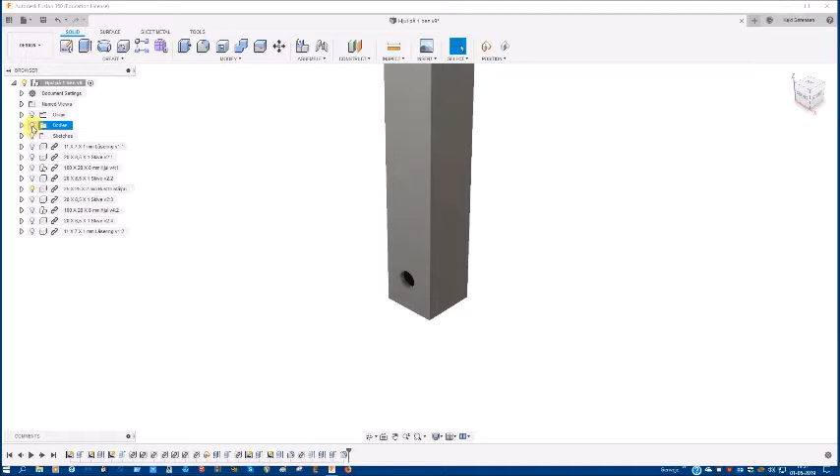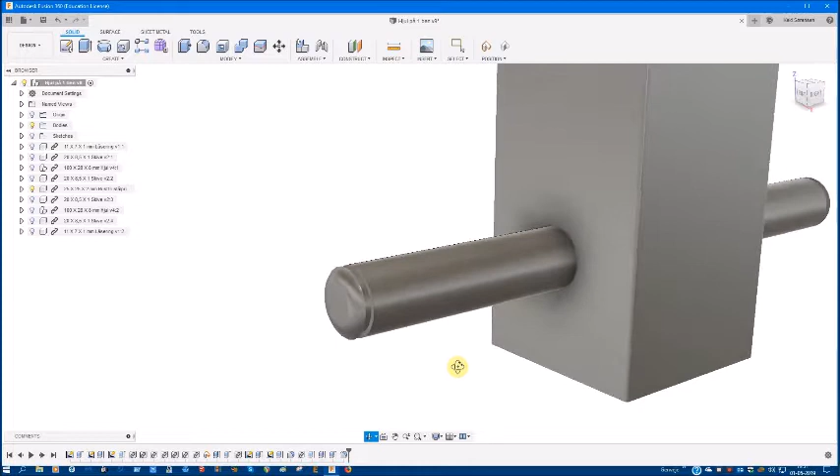Take a look at this drawing here. Here I have my rear legs on a chair, and I've already cut off a piece down here to adjust for the wheel, the radius of the wheel. And I've drilled a hole through here, 8 millimeters, and then I plan to make an axle, 8 millimeter stainless steel, and I've made a form tool for my lathe to make this ball or dome shape here, and another tool for making this groove for the locking ring. And of course they are repeated over on the other end of the axle.

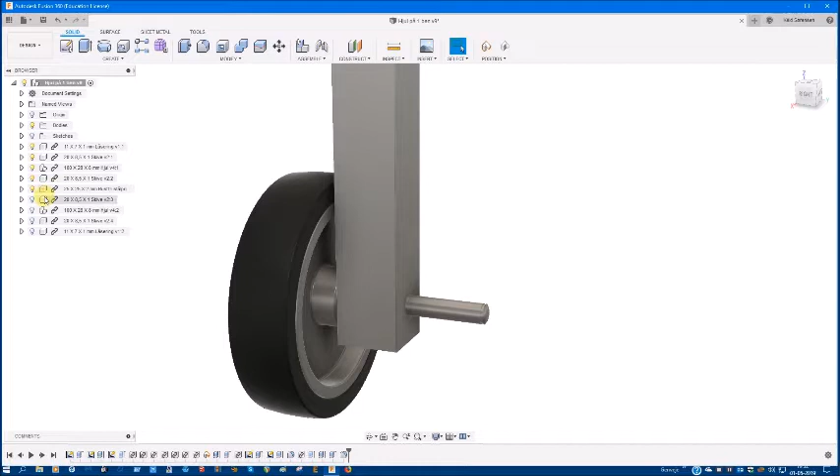Then on each side of the leg here, I plan to have a washer close to the leg and a wheel on top of that, and another washer, and then the locking ring. That's one side of the leg, and repeat it on the other side here. That's how it looks.

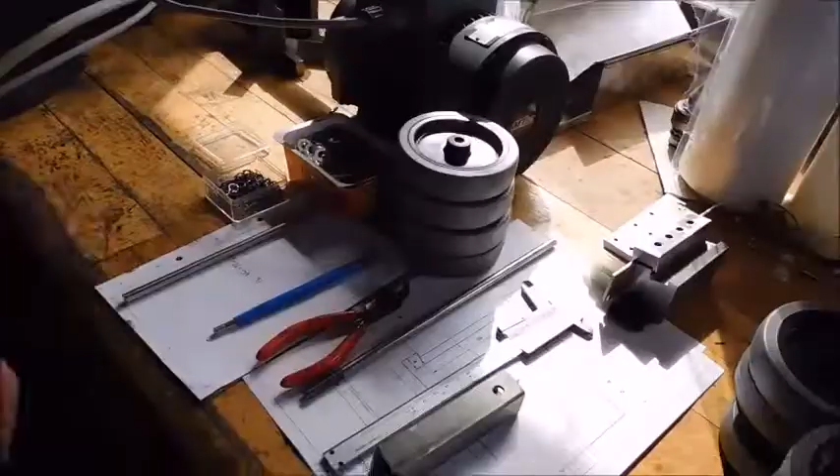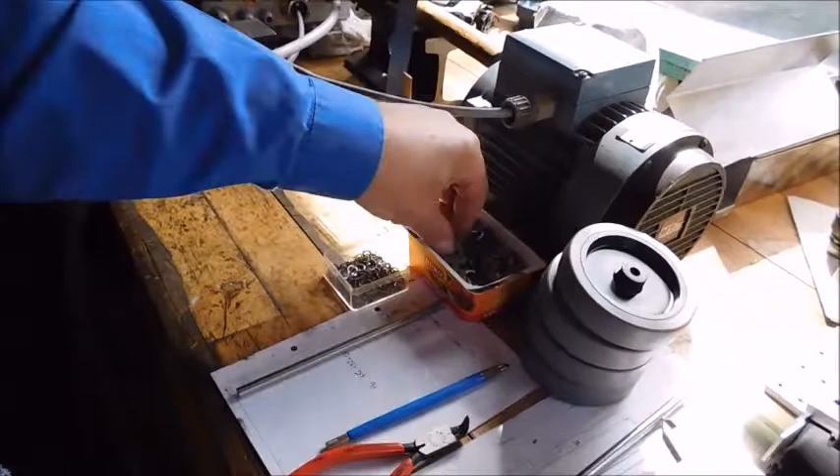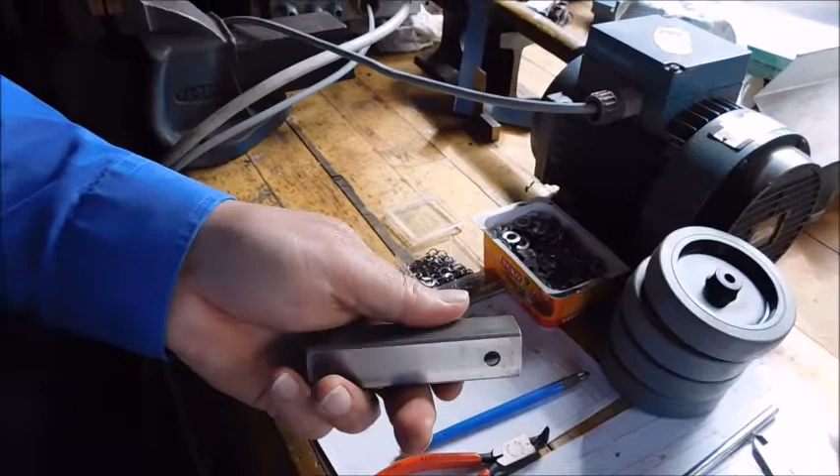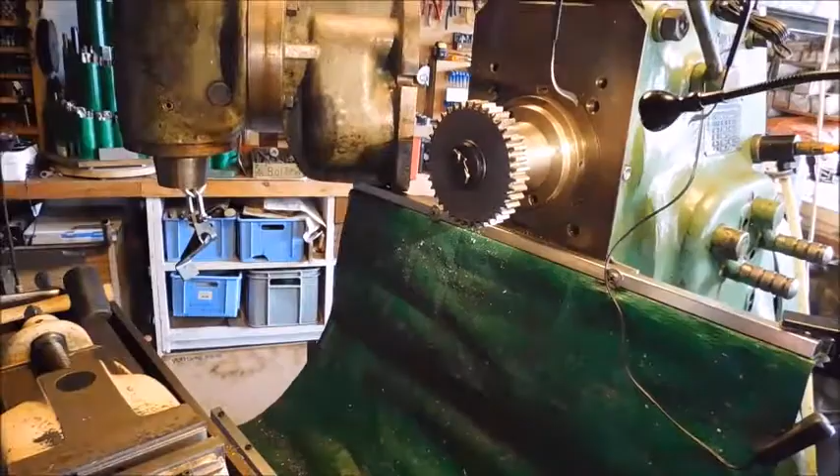And I'll make all this hardware in the first place, so that when I have cut the legs and drilled the hole, I can just mount this hardware on each leg, and then I think it's relatively quick to change the chairs to wheelchairs. So let's see.

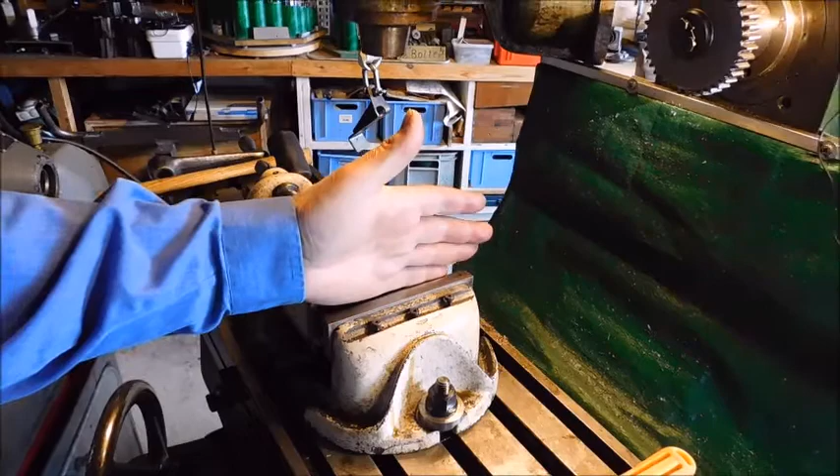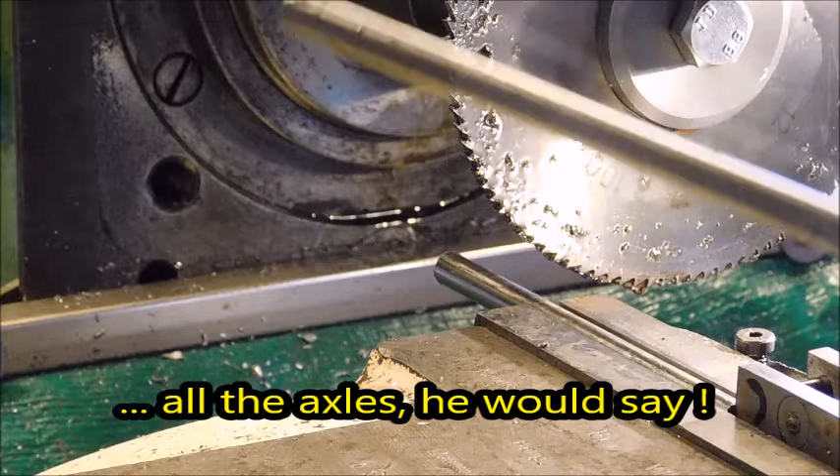I think I can mount this cutting disc on this arbor here, and then mount the small rods in the vise here and cut them into equal length. Later on, when I have to cut off the legs, the rear legs on each chair, I can mount each chair here with one leg here and the other floating in the air over here, and cut the length off, and then move the chair over here with the other leg and cut the other leg. So I'll prepare for this cutting in the first place.

Now I've set it up so I can cut all these pieces here in the correct length. I have a stop here on the back jaw of the vise at exactly 91 millimeters, and I'll start cutting now. There's some squealing because of stick out on the other side of the cutting disc. Not much this time, but next time it'll be longer stick out.

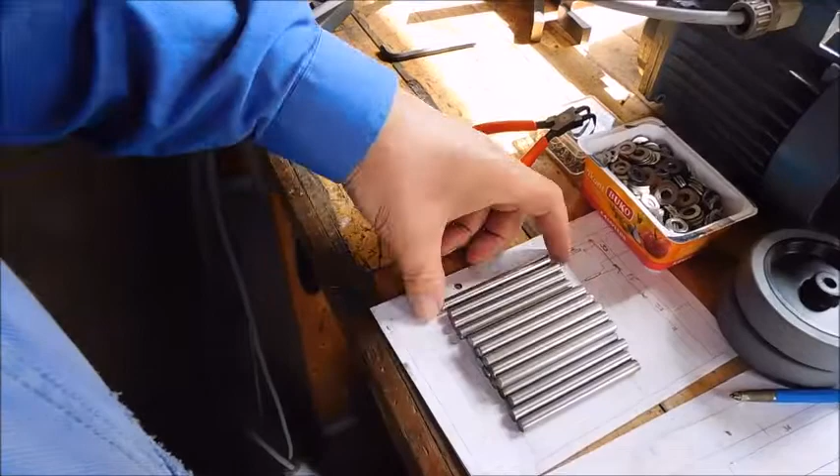Much more to go, so I'll come back when I've finished.

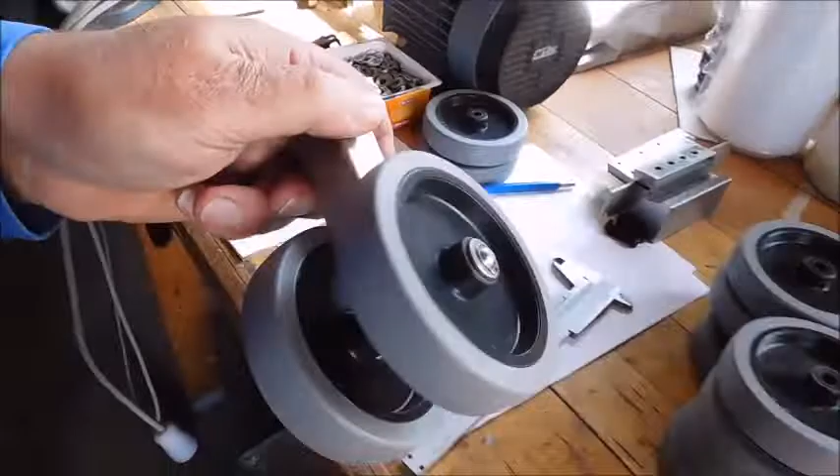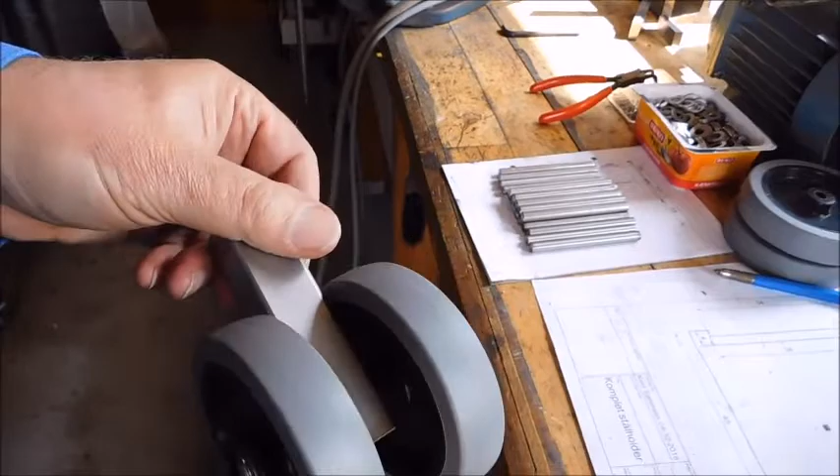Now I made all the axles here, and I cut them to length, 91 millimeter, and now I want to make this ball shape here in the end of each of them, and the groove for the locking ring. And I made a form tool on the lathe to do this, and another tool to cut this relief here. And I made one sample here to show how it looks. I think that's really nice.

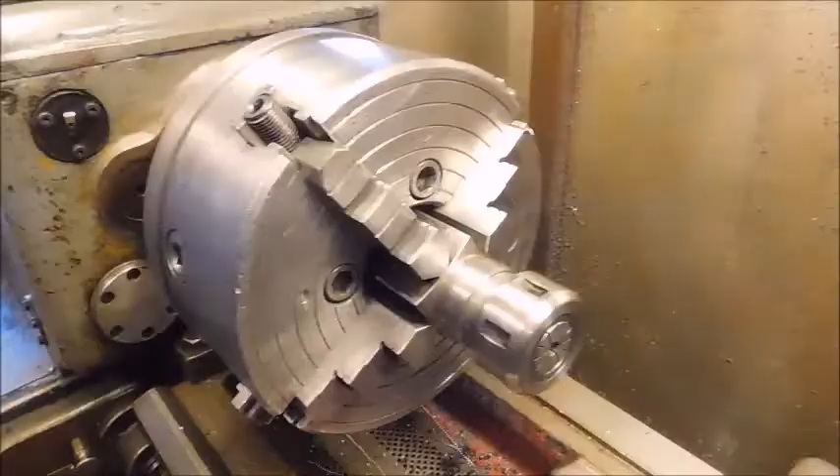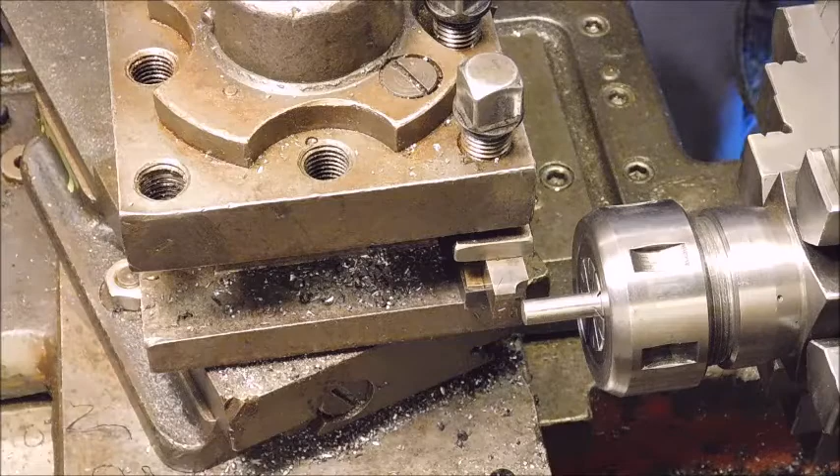So to the lathe and do these. Here on the lathe I have made these tools for forming the dome on the axle, and another one over here to make the groove for the locking ring. Unfortunately I'm not finished with mounting directly in the spindle, so I have to have this fancy setup here with a 4-jaw chuck in between. It would have been much easier to use this, but it's not finished yet.

Now I've set it up in the lathe here and prepared for making the dome in the first place. But I don't think you can hear anything when I start the lathe, so let's talk later.

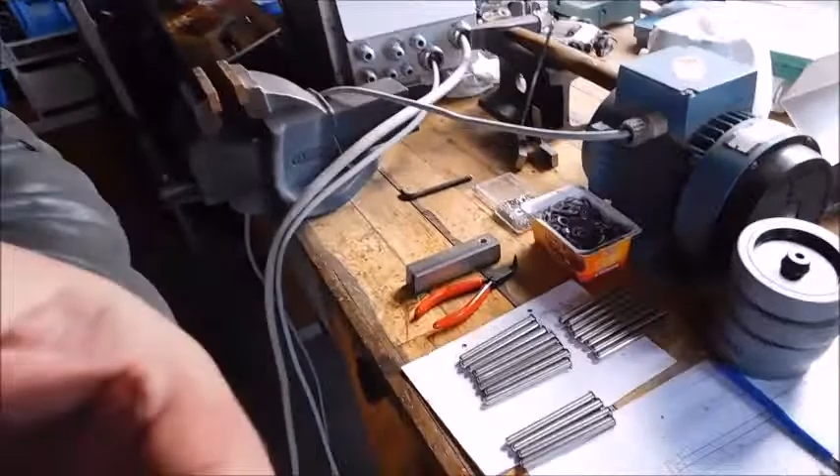Yeah, that's it. Because they are cut off in the correct length, I can just turn it around and do the same thing from the other end. A lot of axles to do, so I'll do that and come back.

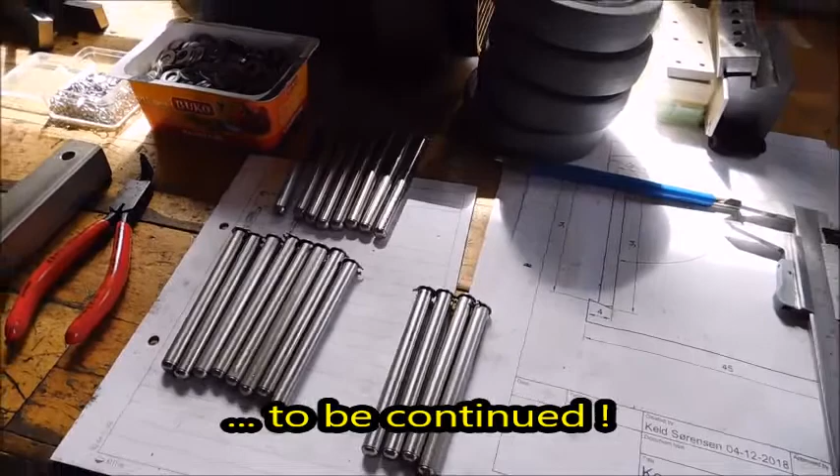Now that short production run is finished, and here they are. A set over here for 4 chairs, and another set here for 4 chairs, third set here for 2 chairs. All in all, 10 chairs. So now the next problem is, how am I going to mount the chair in the mill, and afterwards cut off the legs, and afterwards how can I mount them in the drill press to drill this hole.